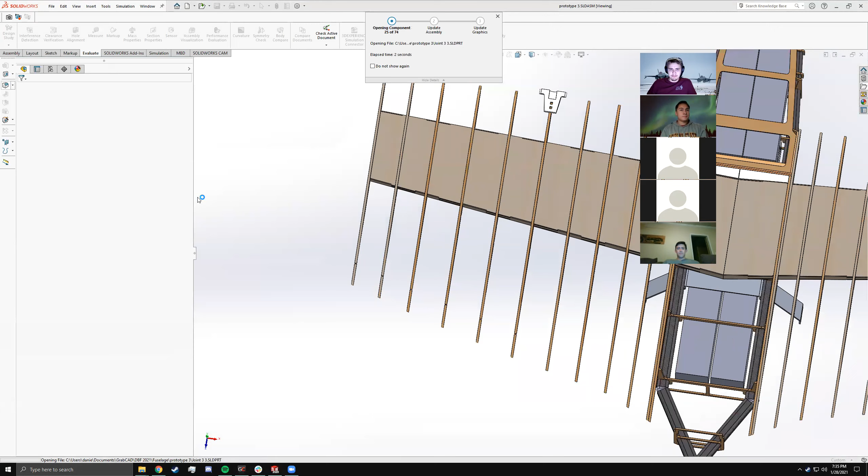Without further ado, let us open up the CAD and show off what some people have been doing. So here is our work so far. We have the aircraft mostly feature complete.

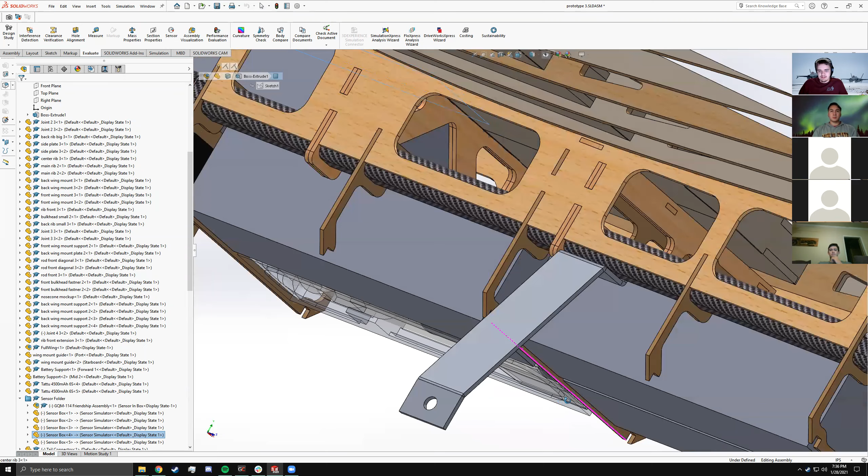There's still some things that need to be done, like actually placing servos inside the CAD model and getting the front landing gear in, and placing in supports for these payload boxes in order to prevent them from shifting around during flight. We also need to design some sort of floor and access mechanism to get these sensors or payloads in and out of the fuselage for mission 2, the payload delivery mission.

There's also a configuration manager, which I've spent a lot of time on and had to redo multiple times. Now there are the various different payloads, or the configurations, for mission 2 — for example, if we were to only fly with 4 payloads in mission 2, or 6 payloads in mission 2, and of course mission 3, the flight with a single payload.

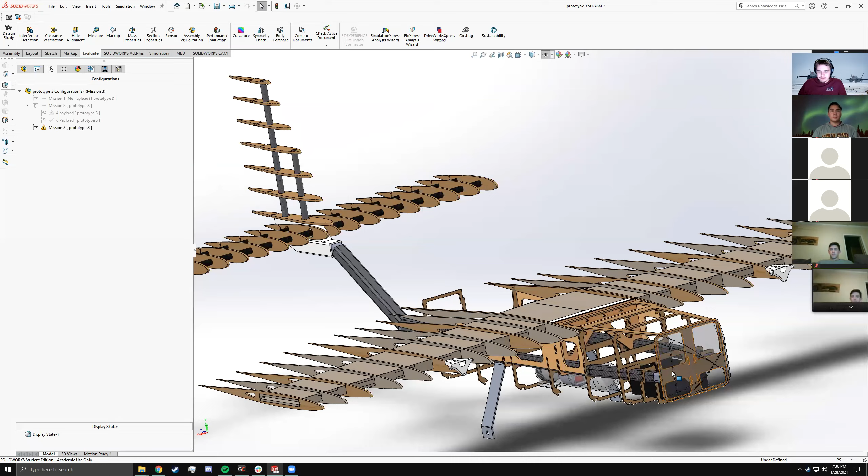We do need to make some minor adjustments to this configuration in particular, in that there should be a recess in this bulkhead right here in order to support our sensor design, or our sensor inside the fuselage while it is strung up, basically.

We also need to include the retraction mechanism that's still in here, but other than that, there's a lot of good work in here that I am very proud to see a lot of our members contributing to.

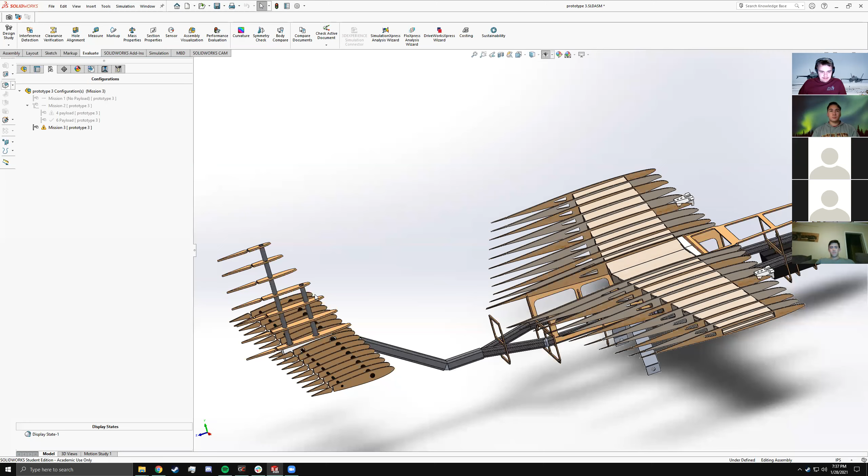Like Zach, who was working with Kevin to design our empennage for the aircraft, which you guys have done a really good job on. And Pranjul, who's working on the fillet that basically connects the aft end of the bulkhead to the keel in an aerodynamic manner. So good work, guys, on that — give yourselves a pat on the back.

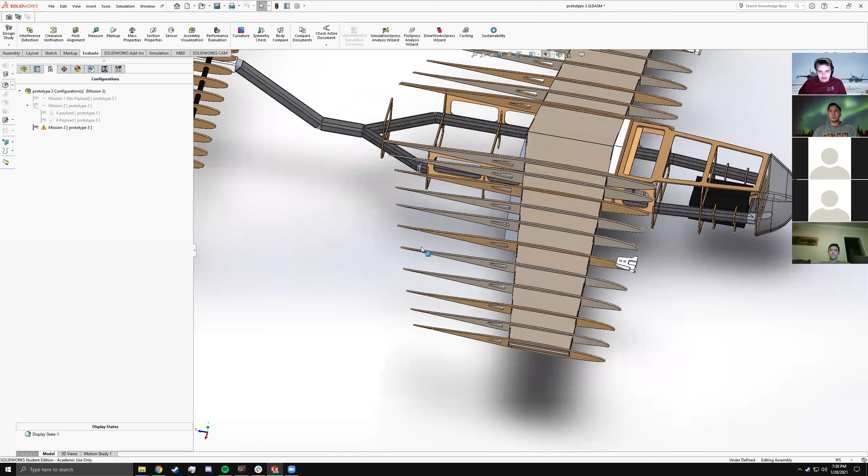But yeah, what we were just discussing about earlier in the conversation is that there are a couple things that we need to update on the wing of the aircraft.

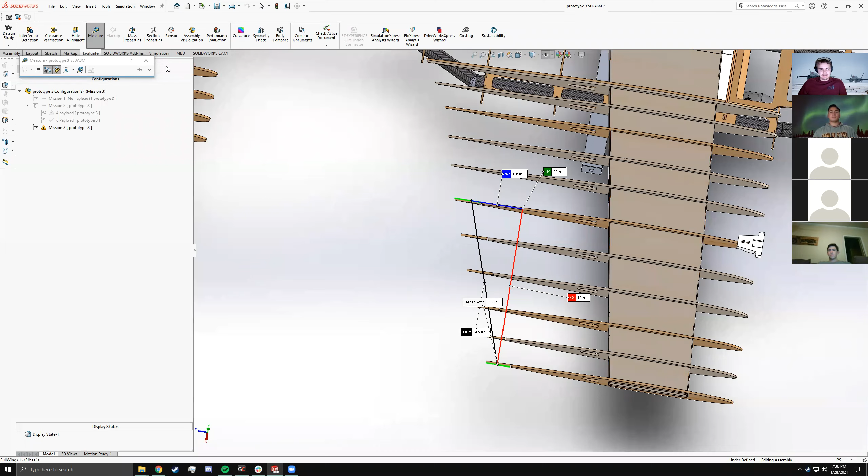Currently we have the ailerons sized at 14 by 2 inches, and I don't know how long to the center rib... I think it's 14 inches by 2, so 28 inches on each side. We need to basically shorten the rib and/or shorten the ailerons and make them wider in order to keep the same area, but also significantly ease our actual manufacturing, because little tiny bits of plywood are liable to snap and break and not do anyone any good as ailerons.

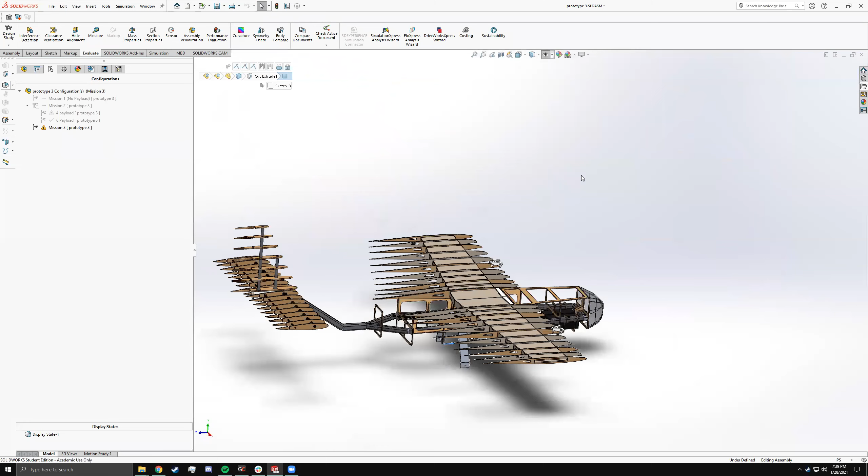Well, some planes might be able to fly without ailerons. This one might be a bit difficult. Ask Evan, how easy would you think this plane would be to fly without ailerons? Me? Yeah, probably... without ailerons, you cut out there. I don't think you'd be able to fly it without ailerons.

So we'll make those a little—finalize the shape of that in the near future.

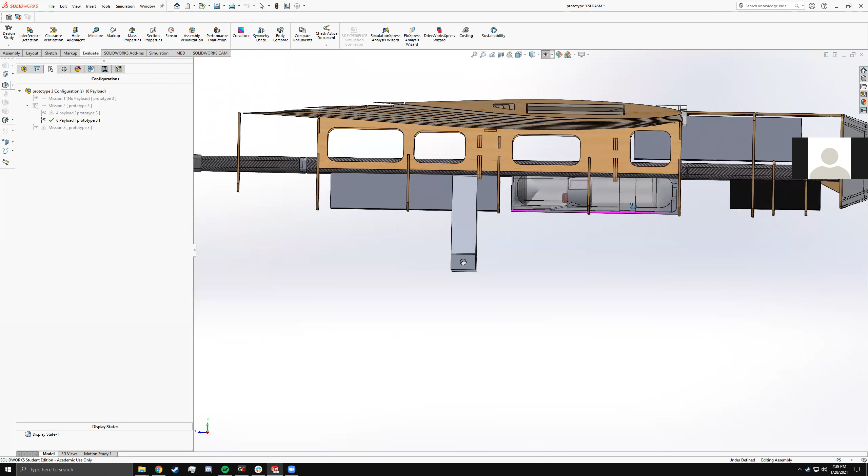Another thing we were discussing is that with the Mission 6 payload configuration, which will be about 20 pounds of aircraft all up, we'll need to have our landing gear maybe forward of this bulkhead. That has to do with the rotation angle on takeoff.

What is the command to rotate the camera in SolidWorks? Like, I know I can do this, but I want to rotate around the x-axis. I believe hold Alt and something. No.

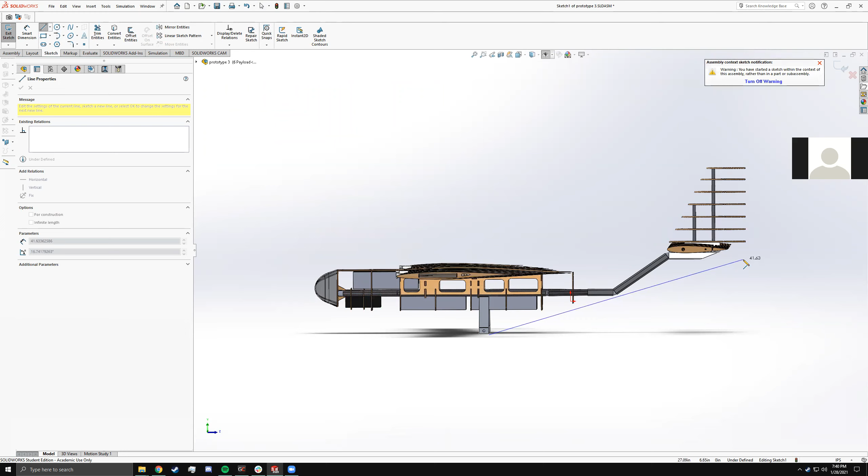All right, whatever. So basically, if you can imagine on this, there is an angle that exists here on takeoff that is dependent on the landing gear's location and the location of this kink in the tail. So if we move the landing gear up to say here, that angle is now shorter, and that's less rotation than we can get on takeoff.

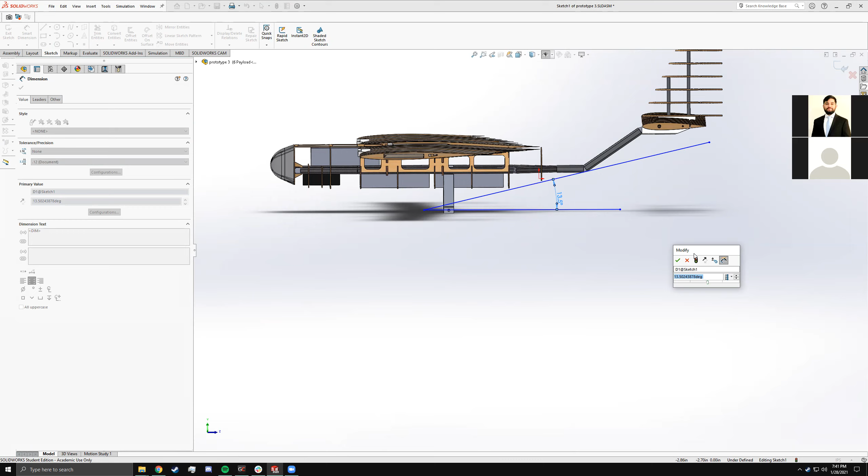So that's something I need to go ahead and figure out, because currently that's 13 degrees angle of attack on takeoff, which is probably enough. The plane will probably stall out much sooner than it gets 13 degrees AOA. But yeah, that's just something we need to take into account when designing this aircraft.

Would adding a sweep to the wing help for the rotation that you were talking about?

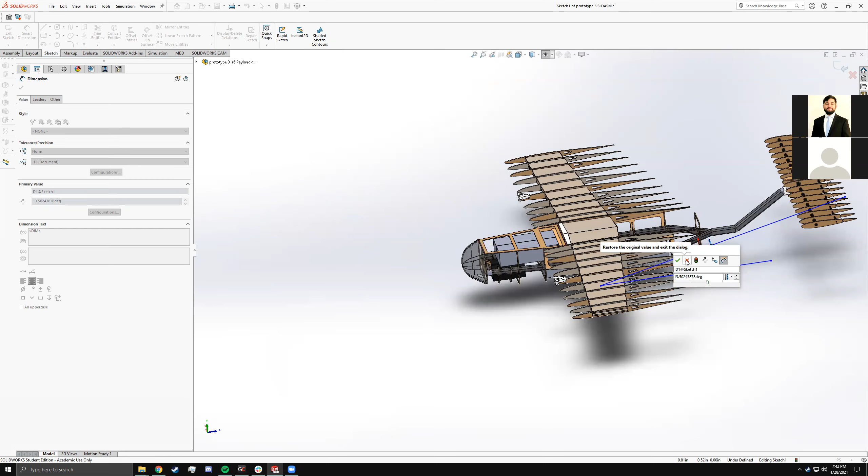No, no. Adding sweep to the wing would move our center of pressure generated by the main wing structure farther aft, which would actually make it a lot harder to rotate the aircraft on takeoff, because the center of gravity would be farther away from the center of pressure. That's the opposite of what we want. Stability is one of the most important things when designing an aircraft, but if the aircraft is too stable, then you can't get the nose up on takeoff, which is something we want to avoid.

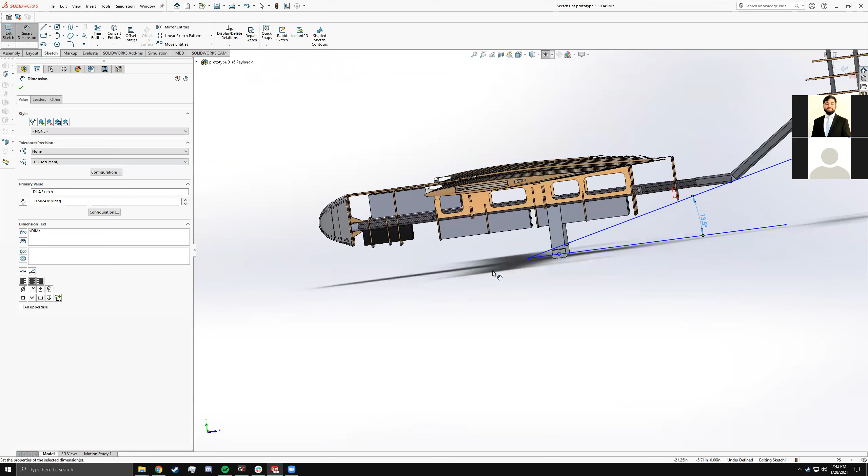We'd like the aircraft to be as close to balanced with some stability as possible. Less 747, more, I don't know, C-130.

So, where exactly, or what's the difference between the center of pressure and center of gravity in this aircraft right now? How far are they? Kevin, you want to cover that?

Figuring... Oh, can you hear me or no? Yeah, we can hear you. Okay.

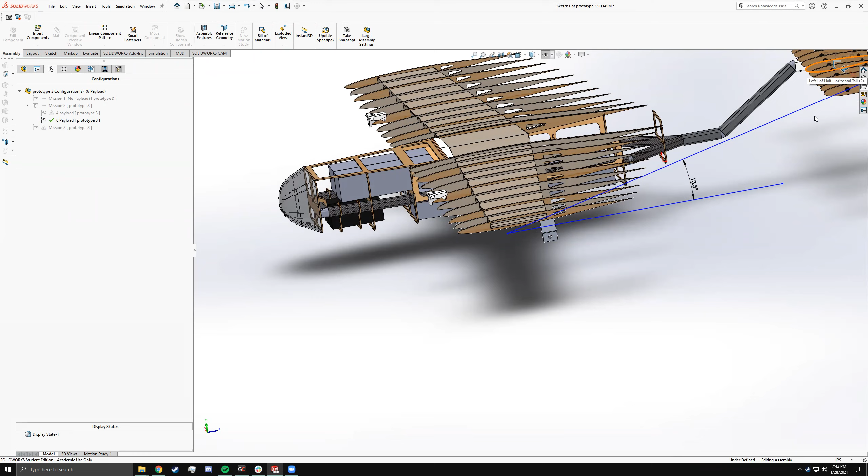So it's going to really depend on what mission we're flying and how we configure the plane, which is something we still need to figure out once we get all our weights and everything double checked. So for mission one, when we only have one sensor, that's going to put basically all our CG wherever we want it to be pretty easily. But for the second mission, when we're going to carry all these payloads, it's going to depend on if we can 3D print them and put a lot of mass in certain places. That's one thing we're trying to figure out if we can do in our manufacturing.

Right, okay, thank you, Kevin.

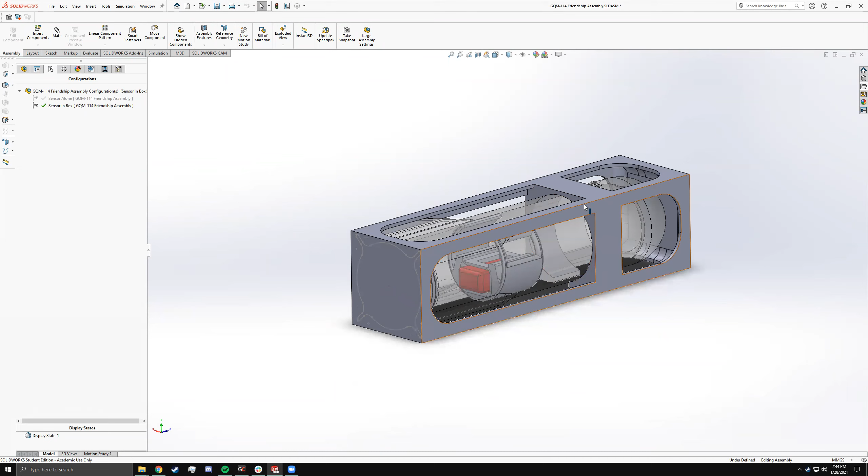I'm working on that right now. I have been hard at work 3D printing our actual sensors. Let me just get that in the tree. I want to open the subassembly. So this is the sensor payload that I have, I designed the aero shell, and then Natish, who is not here right now, designed the actual electronics of the sensor.

I just change this to the actual exterior. So this is the CAD model that I've been working on. If I just open this part directly, and then here is the actual sensor as built. Let me just turn off my virtual background so it doesn't get cut out.

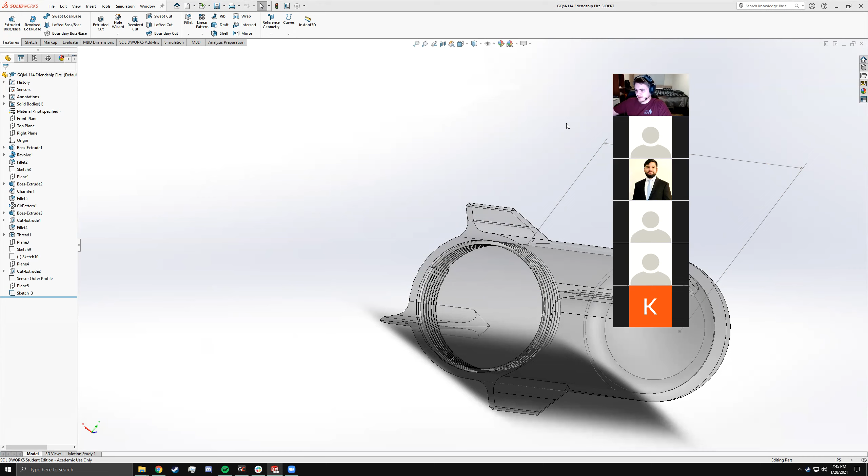So here is the sensor as 3D printed. It has threads inbuilt and aeroshell basically, but it might be heavier than expected. So I need to get a scale to actually weigh it and figure out how heavy it actually is so we can then adjust how heavy everything else needs to be.

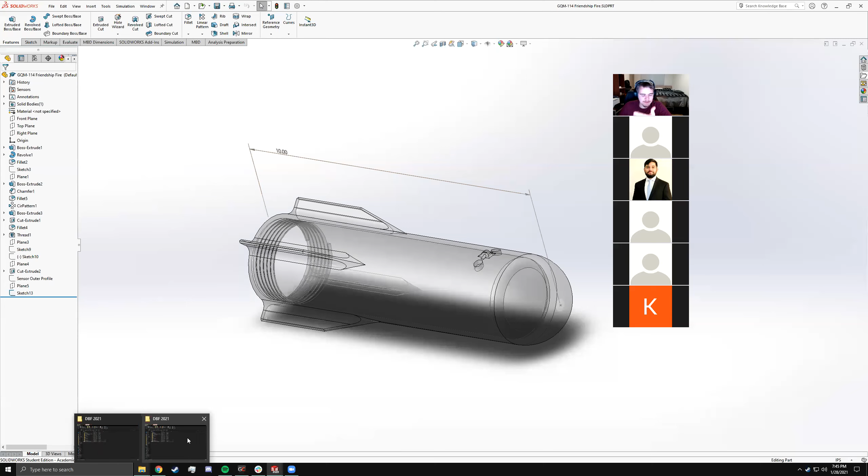There was a weight estimation in the SolidWorks, when I actually printed it out, of about 600 grams or so. Dang, so this might be actually kind of heavy, and I might need to print this again, but with some different settings to hopefully add lightness.

There's a lot of things you can do when actually printing this versus how it's designed, to adjust how heavy it ends up being. So I'll play around with that.

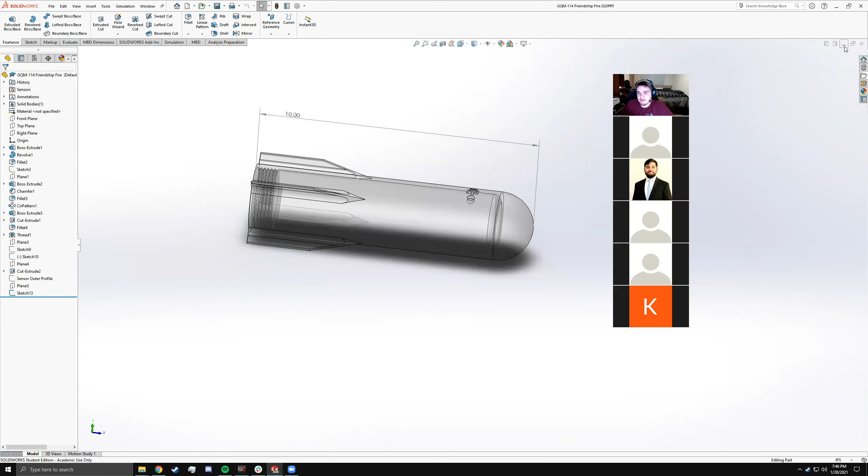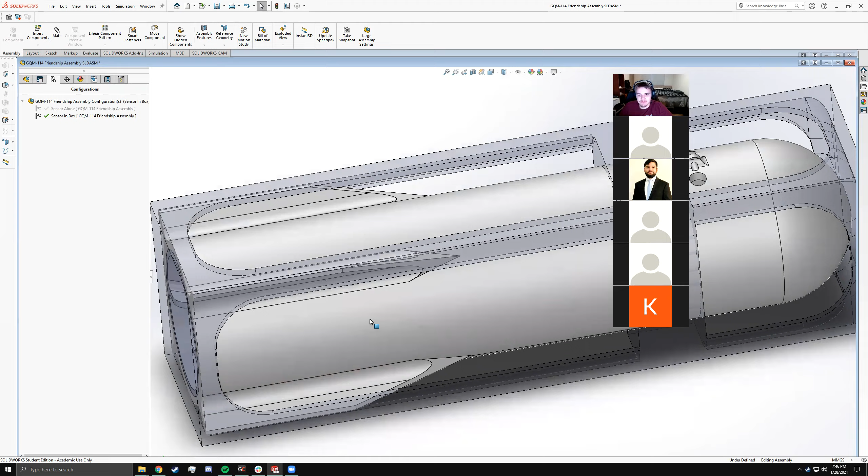I had a question in the chat earlier about how long this took to print. This took 17 hours basically of my printer running in the background. I'm running the printer right now to make the other components of this subassembly, such as this back insert here, which acts to create drag on the aft end of the sensor. We want the center of pressure to be as far back as possible to make this thing as draggy as possible.

Did you make sure the threading tolerance isn't too tight? We'll find out. Luckily, this base insert is a lot quicker to print, only about 3 hours, so I can print another one with slightly different sizing and threads to try and get one that fits, versus this one that takes a long time. In fact, we might even try to test fly this this weekend, if possible.

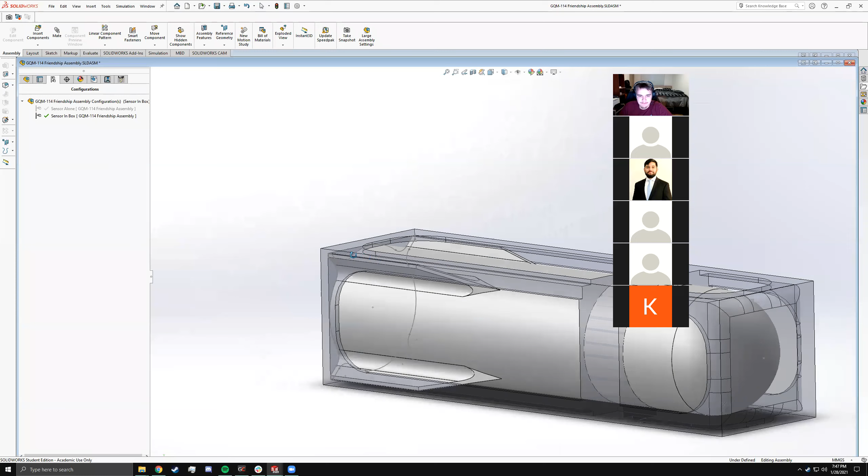Yeah, we need to bring the plane. Oh yeah, Evan has it, right? Yeah, and we can basically tow this underneath last year's aircraft and determine how stable it is, basically, without any mass in it. So that'll be something we'll figure out tomorrow in the leadership meeting. We'll let you guys know when and where we're gonna be if we do plan on test flying this weekend.

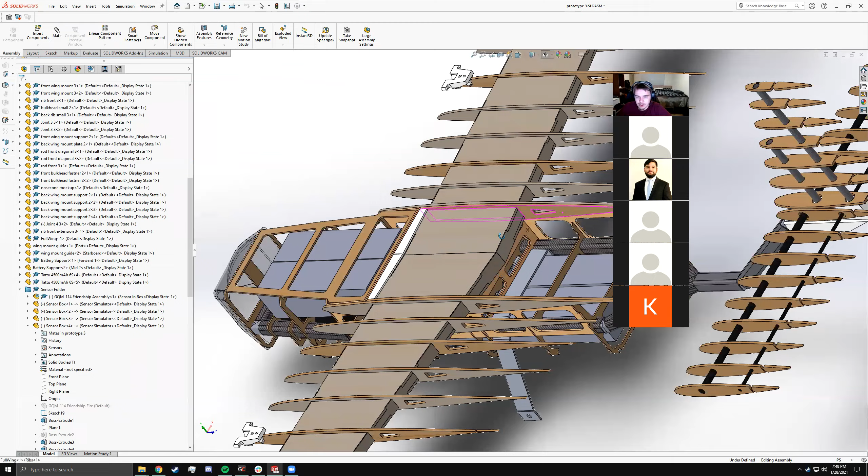So going back to the main CAD model, landing gear placement needs to be finalized. We also need to design and implement into the model how the aft end of the torque box will be held on to the aircraft, basically.

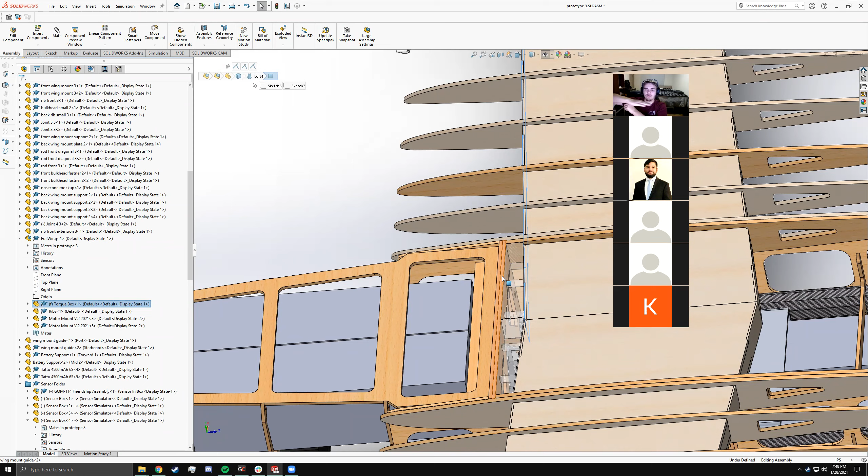The current plan is, if I just change the transparency of these guys, there are channels here that connect to this front bulkhead that then go into the torque box, and there will be dowels that connect the two to prevent the wing from twisting off the fuselage. But we still need something to prevent this back end from sliding backwards or lifting off too much and snapping this whole bulkhead, because both of those would not be good.

The wing is probably the one part of this aircraft that needs to be staying on all the time. We can lose bits and pieces here and there, and it wouldn't be pretty, but if we lose the wing, all hope is lost.

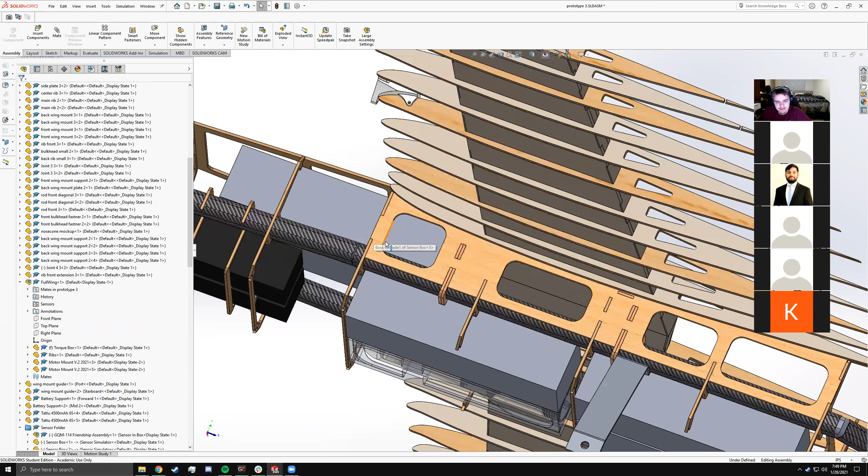There's some really good design elements in here that I'd like to highlight, which Ivan helped put together. There's this side plate that forms the main part of the fuselage. What's really cool about this side plate is that it also acts as a locating feature for all of these bulkheads that go throughout the body of the aircraft.

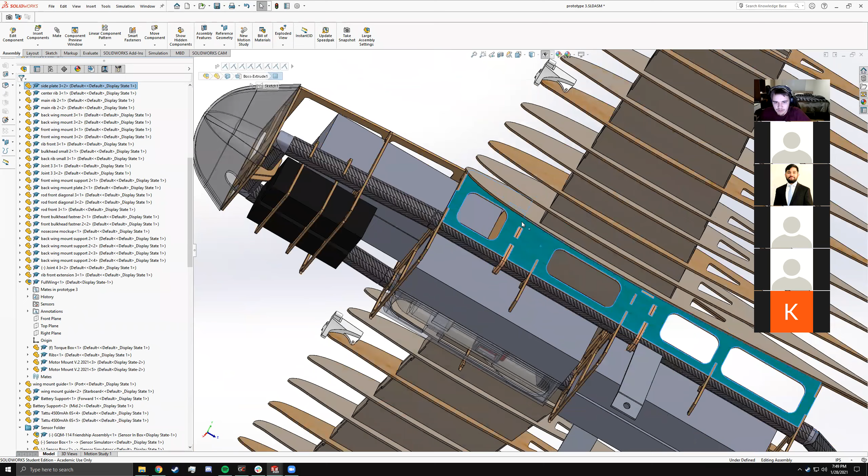Unlike a lot of competitions, we actually have to end up building this thing—still working on that. By having this side plate referenced to these bulkheads, the side plate acts to locate the bulkheads onto this bar. So by simply putting this piece together, snapping the bulkheads with the side plate, everything is already pre-located, and we don't really have to guess where things need to be.

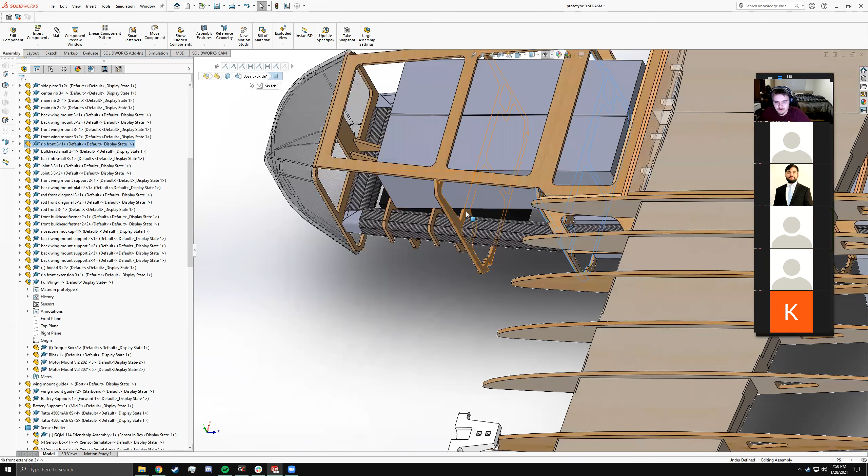You can't always get away from that. For example, this piece, we're gonna have to carefully measure the distance between these two before we glue on the bulkhead to the keel piece right here, and same deal with these pieces which hold in the battery.

But as much as we can get away with it, I'd like pieces to have some locating feature on them. And as part of that...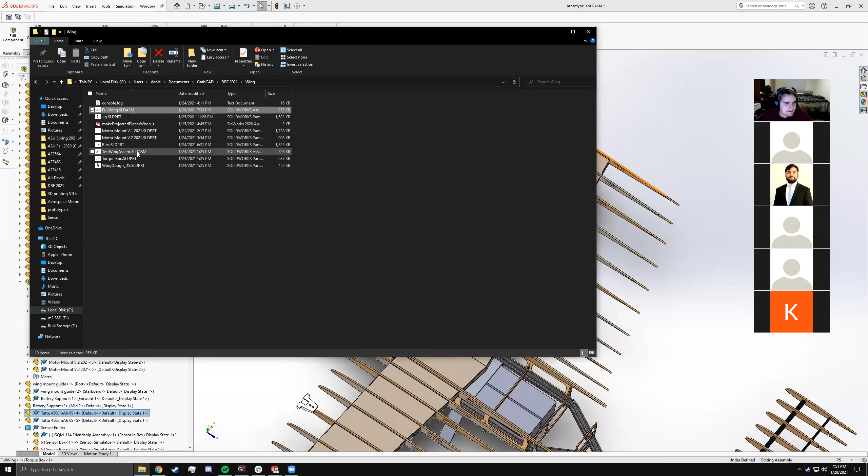Jack here went ahead—where did you put the jig for the sensor retrieval? Jig? Okay, yeah, then that is going to be under the wing. Gotcha, the jig is right underneath the full wing. Okay, do you have the assembly with the wing in it? Yeah, you do. That's just the mock wing, though.

So this is an example of making manufacturing tooling that we can actually use to build the aircraft. This piece, the torque box, is made of a couple pieces of balsa wood glued together. But then we have to align ribs onto the torque box to actually make the wing, and the placement of these ribs is fairly important.

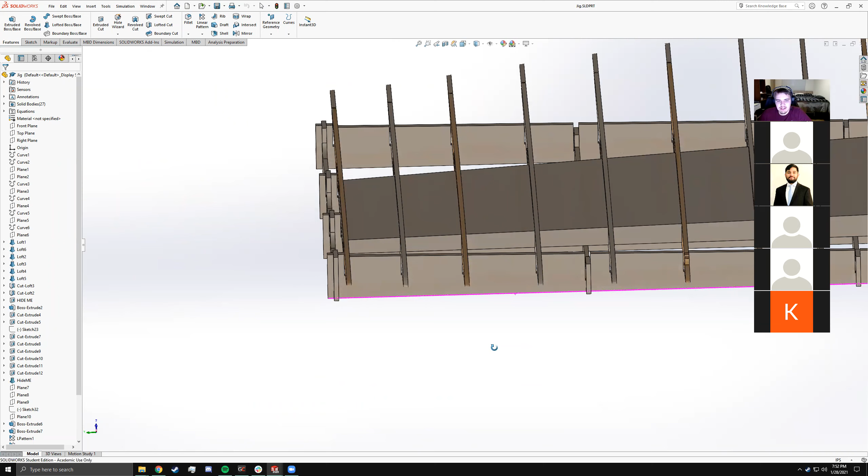We want them to be as vertical as possible, aligned with the torque box, as well as properly spaced, because if they're too close together, we end up losing some of the strength of the wing. It also makes things harder, especially if a rib is misplaced, since that's where the motor actually attaches to the wing. If the motors are asymmetrical, that causes problems for our test pilot, Evan, so we want them precisely aligned. Having a piece like this that we can laser cut to the machine's precision, instead of using the old Mark I eyeball to guess placement, helps a lot.

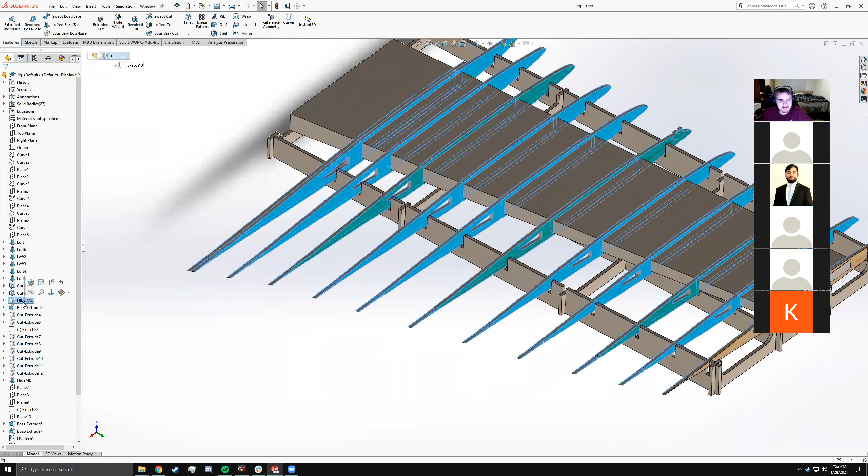That looks really good. There's two things called 'hide me' - if you hide them, it just shows the jig, not the wing.

This will be something we can laser cut out of wood, which will make building the wing a lot easier. In the actual aerospace industry, building it is probably 60 to 70% of the battle versus designing it, so it's good to have that design sense in our actual CAD model.

All right, so does anyone have any questions?

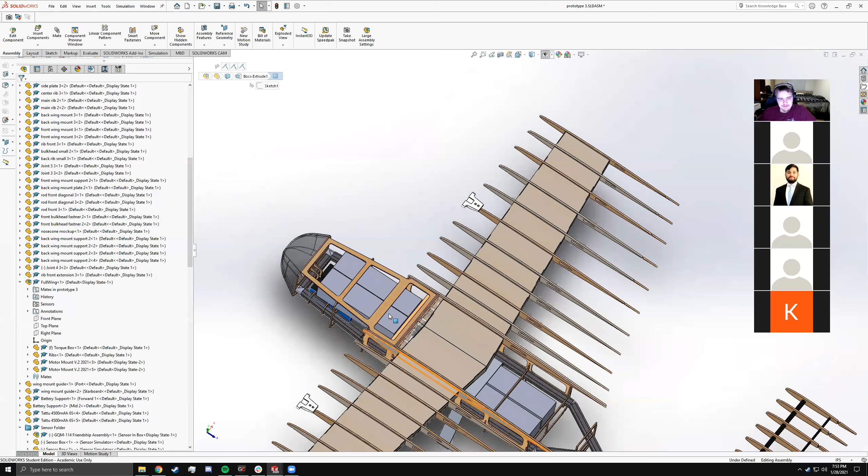If you want to try to put in the sensor retrieval mechanism, I haven't changed it very much, but you can import it in.

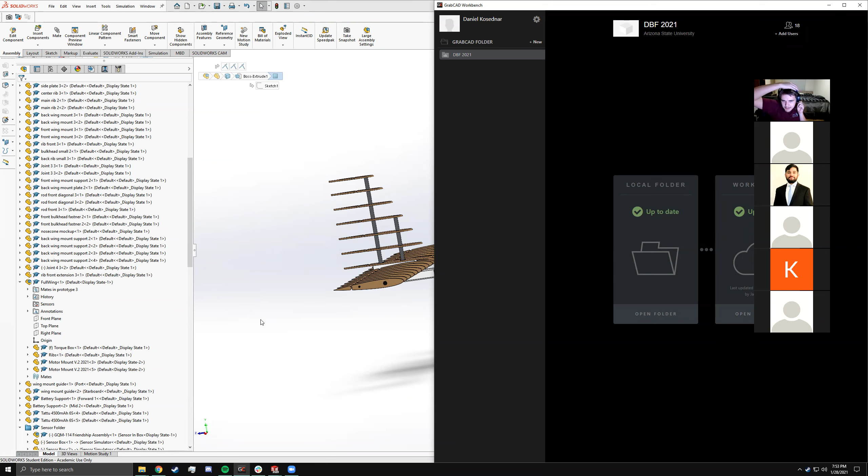All right, where is this supposed to fit? I should probably make it mission 3. It's pretty much right next to the batteries, in between them and the one sensor.

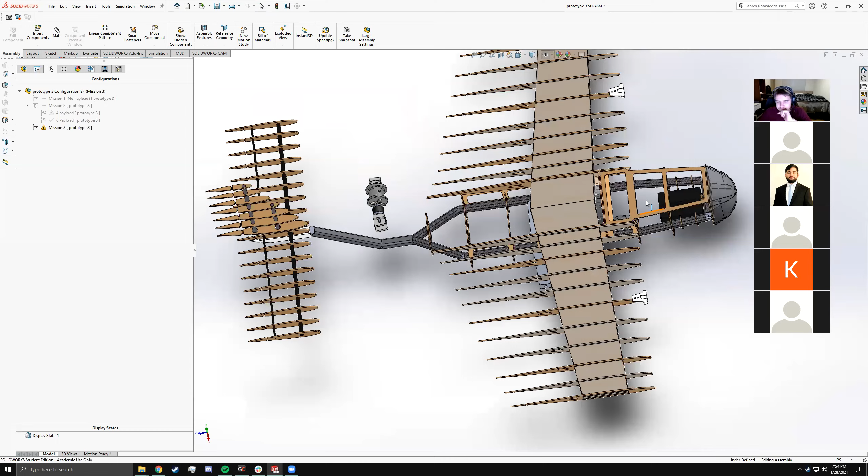I have a message in the chat. Can someone read that to me?

I am a freshman, I don't really understand anything, but I find this stuff so interesting. Hope to learn a lot from you guys. Sure will, yeah you will. I was once a plucky freshman who didn't know Jack. I didn't know Jack as a freshman, but now I know Jack. Your puns are great. In fact, now you know multiple Jacks. Yep, now I know multiple Jacks.

All right. How do I push this forward?

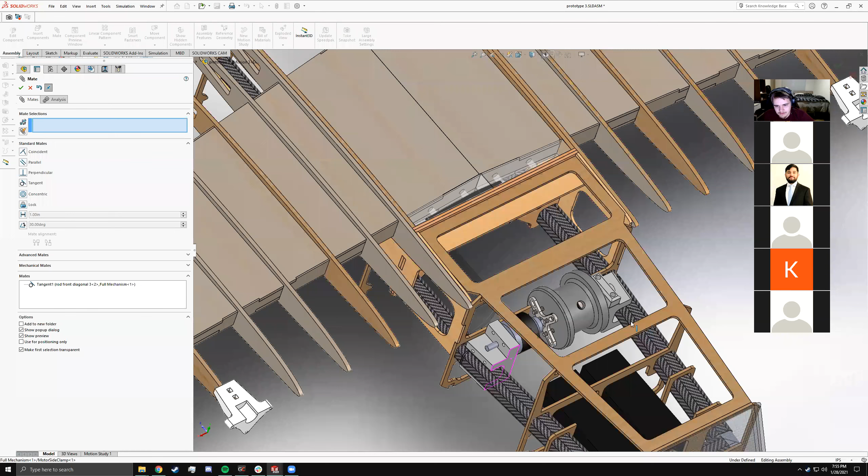It's also never too late to get involved, because there's still lots of CAD stuff that needs to get done on this. If you want to learn, just let any of us know, and we can help you out, and you can help design parts of it.

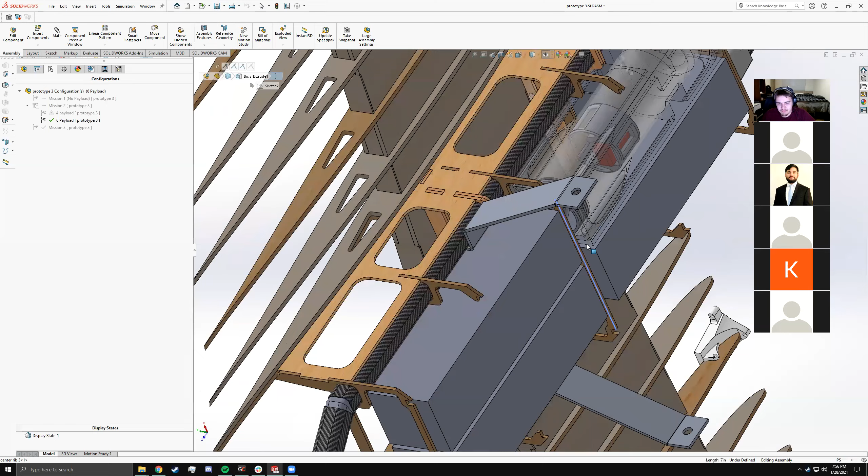Like I said earlier, we had a new member help build this empennage assembly to get that all set up. But we still need pieces designed here to hold the payloads in position inside the fuselage. Probably a floor plate, a removable floor plate installed here for the ground mission to actually load the sensors into the fuselage. That also needs to prevent the payloads from falling out in flight, because that would not look very good if our payloads fell out of the airplane.

Can you show me exactly where the bomb bay door is going? Yeah, is it just the...

Daniela, have you figured out the integration yet of that? Is she not here? She was here earlier.

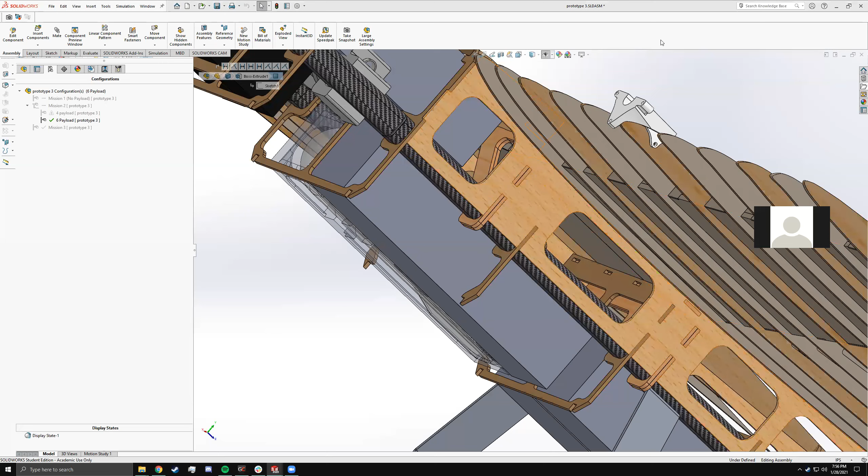Is it just between the first bulkhead and the second one? Yeah, it's between these two bulkheads. There's going to be some servos down here that actuate the doors.

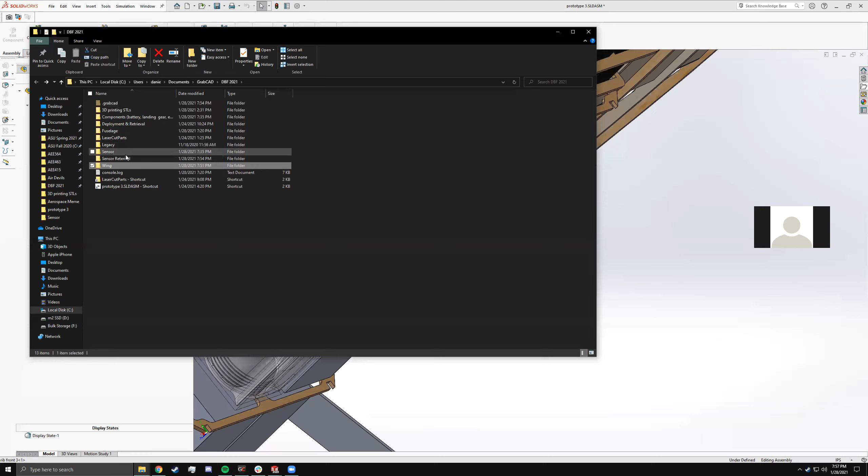I'll have to make sure I don't put my sensor mechanism in a way that will block that. It'll look something like this, basically, with servos back here, so the doors open up. Most of the intruding parts are in here, but we might have to, considering how tight the fit is...

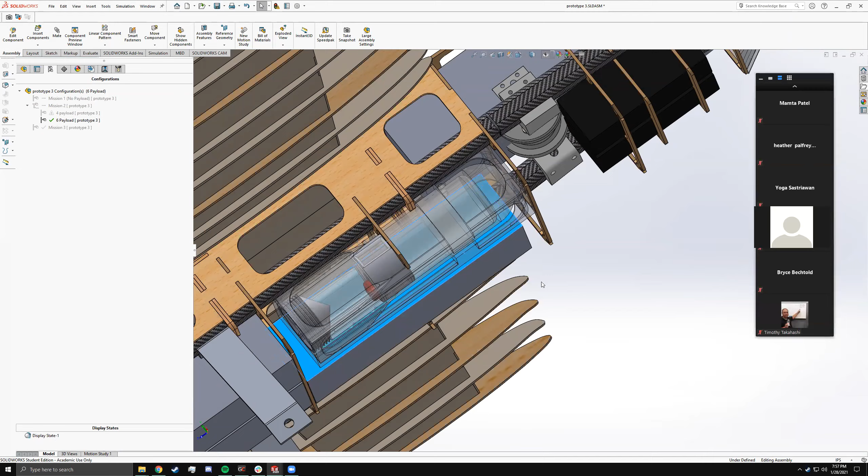No, don't do that yet. Okay, we still have some room that I can move these payloads back farther, and basically we'll have room for those servo arms to fit in front of the payloads inside this bomb bay area. But that will be an integration fun time.

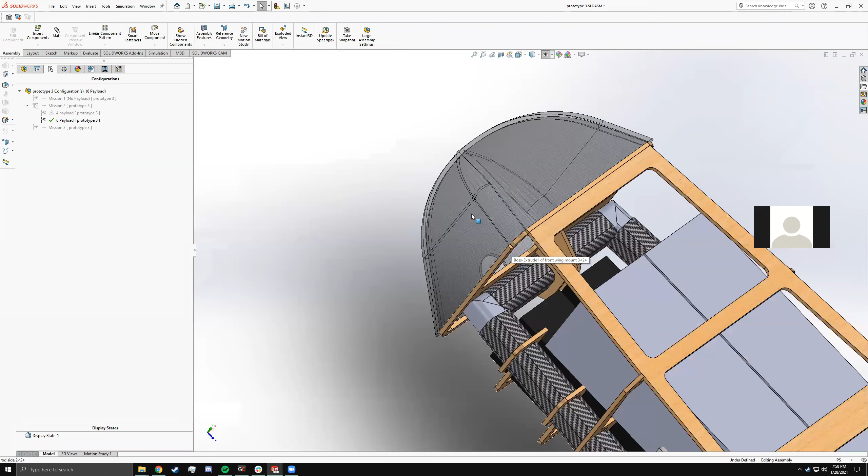SolidWorks is thankfully pretty easy to learn. I learned it mostly through the club, not through the CAD class. And thankfully, it's a lot easier to learn than CATIA, which is a whole other ball game right there.

Overall, this is looking really good so far. We just need to get the last features in, and as long as the payloads fit inside the plane, that's the main thing I've been worried about this past week. So it's looking pretty good, but you just have to watch the space in here to actually fit the moving bits.

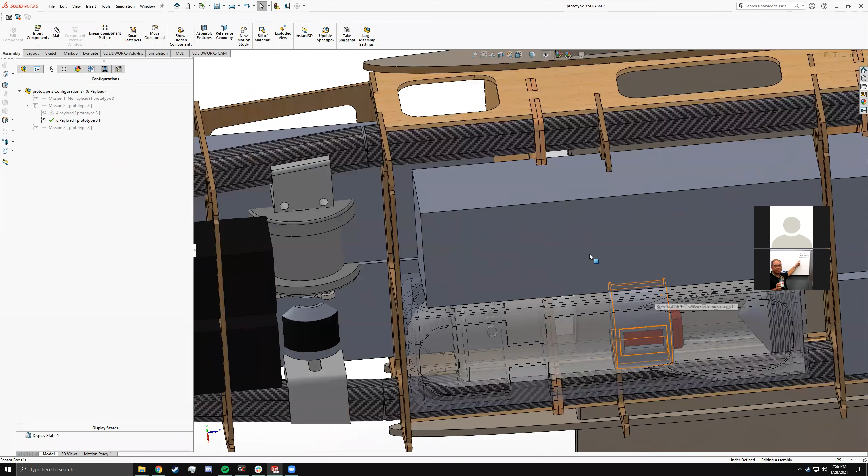Hey Daniel, it's Tim here. Hey Tim, the advisor. Okay, I like the way the loft came together. The only thing is, do you have any more confidence at this point that we are good to go with center of gravity? And if not, what's the fallback position if we got to stretch the nose and move the batteries further forward?

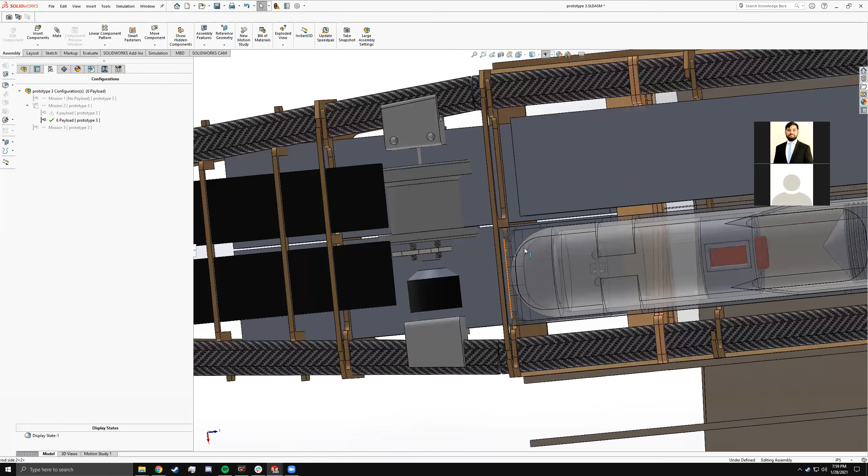So each of these boxes is about a pound. And because the payloads, the sensors just need to be the same outer dimensions and the same mass as the sensor inside the box, we can weight the front of the box versus the back. Therefore we have a lot of freedom to say, for example, our center of gravity is too far forward. We can flip these payloads upside down, just flip them around, and now we have more mass aft, and vice versa.

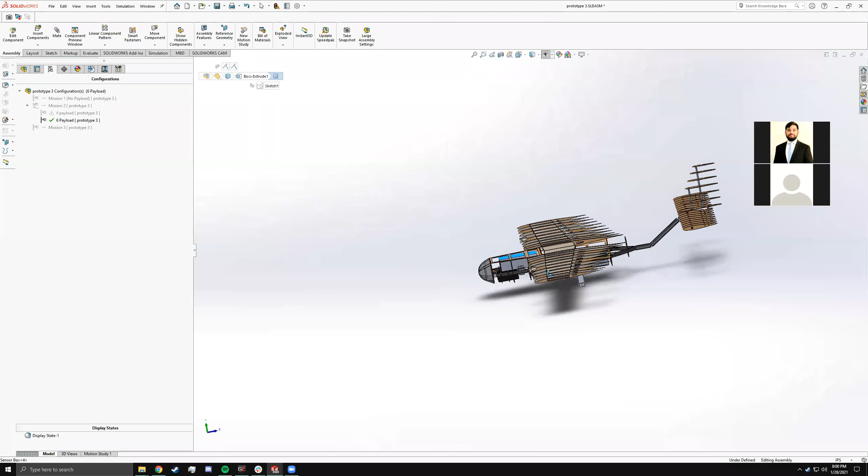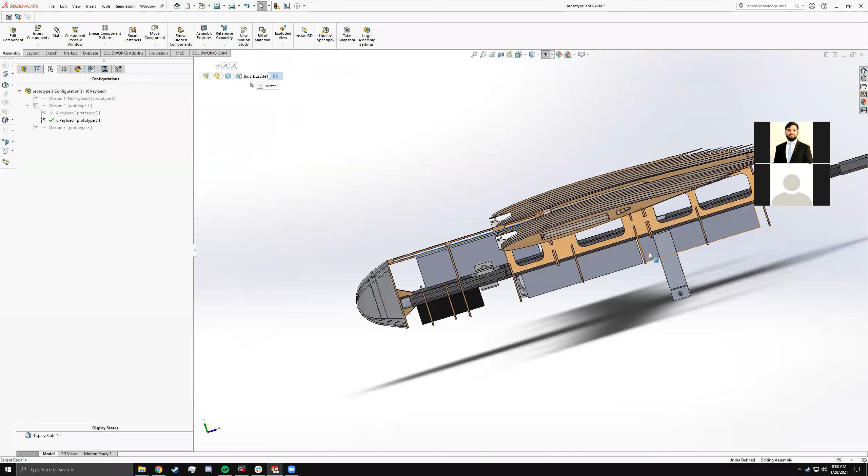So as long as one side is weighted versus the other, it should make things easy to balance out. And we already have a pretty hefty amount of nose on the aircraft, especially if we leave this back section hollow. We could fit 8 payloads in this aircraft, but with 6 front heavy like this, we should be fairly good to cancel out the mass of these two affecting the rear, or to counteract that.

Daniela, how's your progress on getting the bomb bay assembly into the actual CAD model? It's going good, I was working on that earlier. The only issue I have was from prototype 2 to prototype 3, I think the dimensions slightly changed, so I need to just readjust mine a little bit.

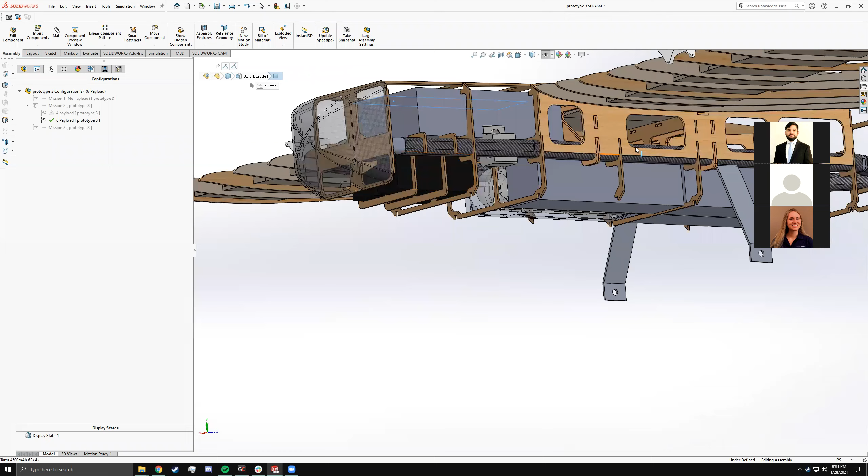I think I'm just going to throw on the door with the frame so I can have the hinges in an appropriate location. And then I might need a little more space for the servos to go in. Yeah, I was just talking about that. We can move these boxes about that far, and that gives you a little bit more space.

But moving other things around, like moving this bulkhead back, would be challenging, and moving this forward would also be challenging. So if you can try and make it fit all the way up there. Okay, I see, yeah, in this area.

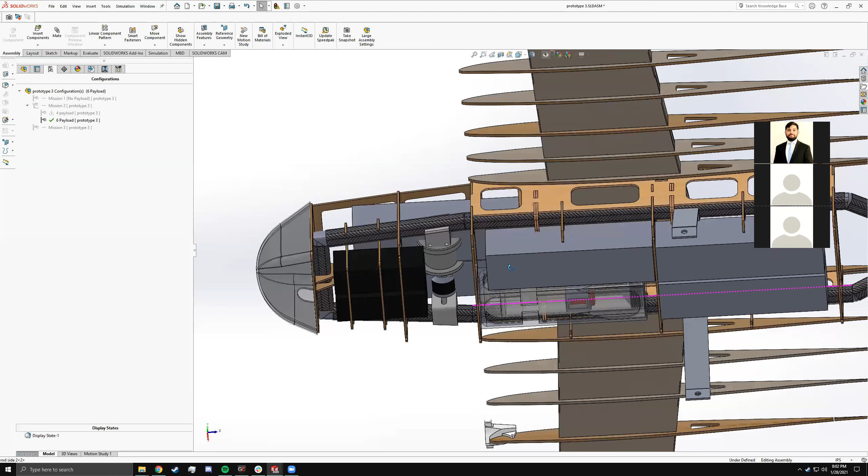I was looking at that rib right there, the main rib, I think. I was thinking of just filling that out and mounting the servos on top of that. But if you want me to push it farther back, I can. You mean this bulkhead? Yes. Just make it solid, like it's in your design. Yeah, just fill it out and then mount them on there.

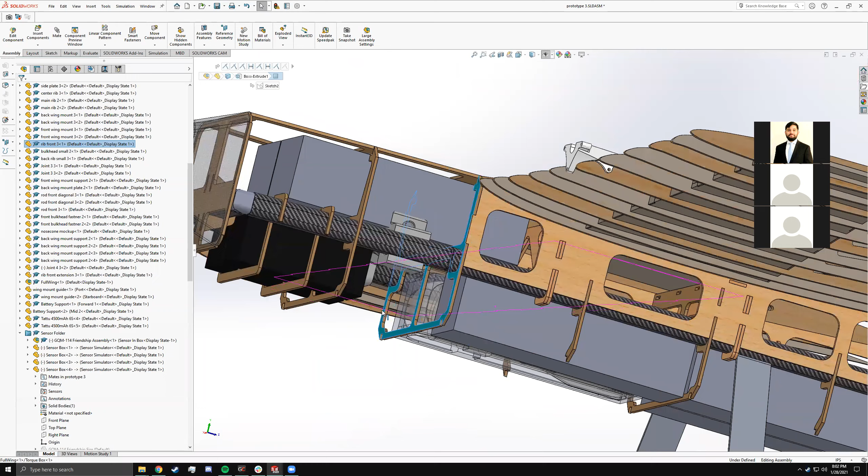All right, that all sounds good.

Jack, if we do end up putting this spinny thing back here for mission 2, we might run into issues. Do you rely on the exact geometry of this angle here to clamp in your mechanism, or do you think you can make it work so it clamps onto the inside keel bit here? So with the square idea versus an angled thing.

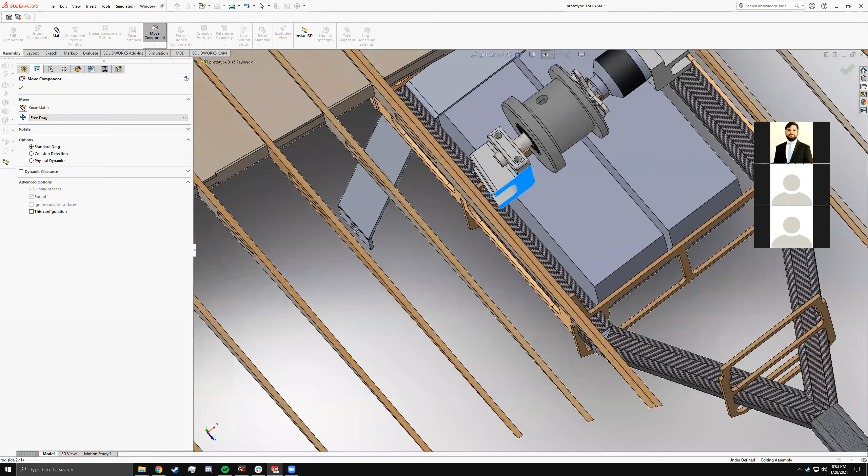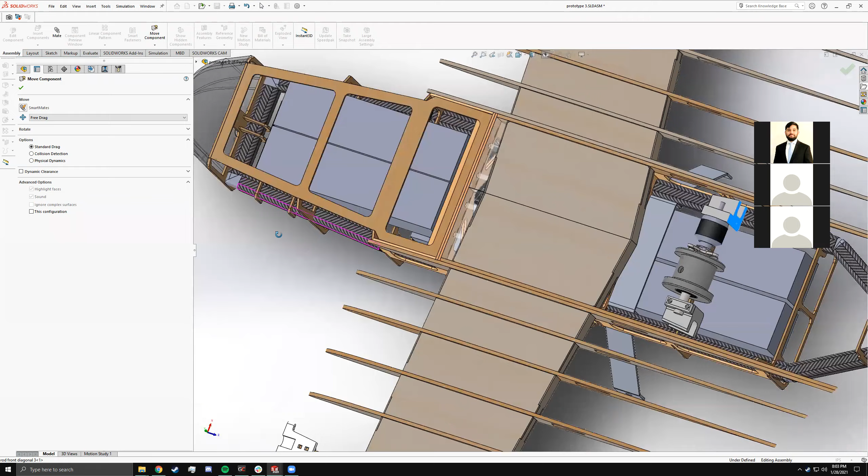The idea is, and I only have it on one side, that the wheel can be removed from the clamp mechanism, so the clamp can stay up front while the back just gets thrown back, like the barrel and the heavy motor. As far as the angle, that's actually really helpful, because any tolerance issues we have, we can just slide it forward, and that will tighten up the space between the motor end and the bearing end.

Okay. Hey, Daniel. Yeah.

You think we could make some of the 3D printed pieces to mount the wing in the front, in the back too, and then move the wing mounts further back? Move the wing mount further back? What do you mean?

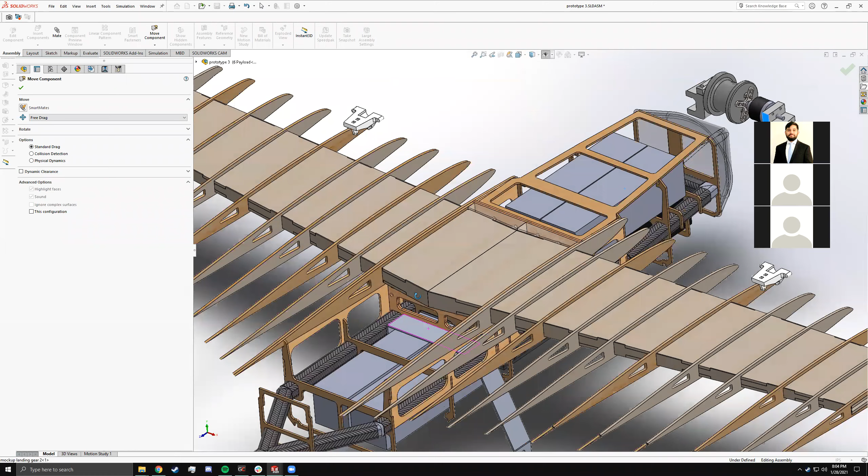So you see, I don't know who put those 3D printed pieces in the front of the wing mount. Yeah, that was Max. We could do that for the back too, and have like a bolt or something, the same sort of deal how we have pegs here, we have a bolt on this end.

Yeah, I mean, that could work. It's just that means we'd have to have some sort of access to this back end to screw and unscrew that bolt. Oh no, but it would be vertical. Oh, like a vertical, the same clamp thing, like how we have the...

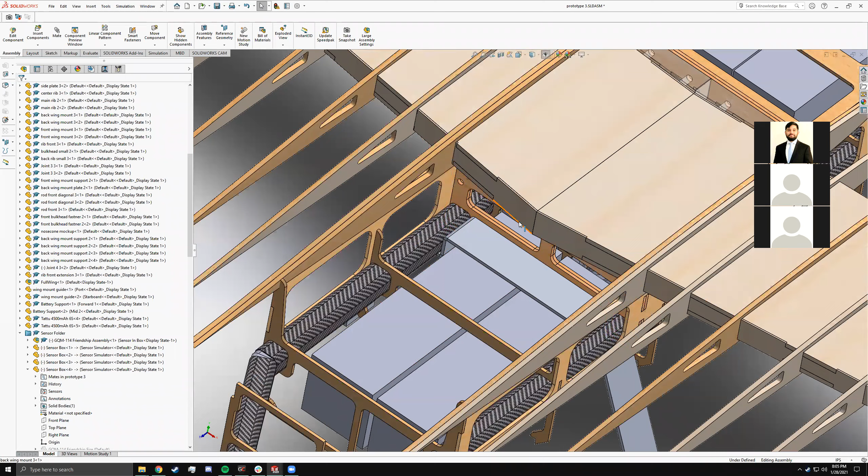Do I have it on this computer? No, I have it on my other computer. Like, how we have the clamp on the keel of last year's aircraft, instead have the clamp on this back end.

Yeah, 3D print an extender piece off the back like we have on the front, so it matches that angle. And then on that 3D printed part have two holes in it that the bolts could go through. Yeah, that'd work.

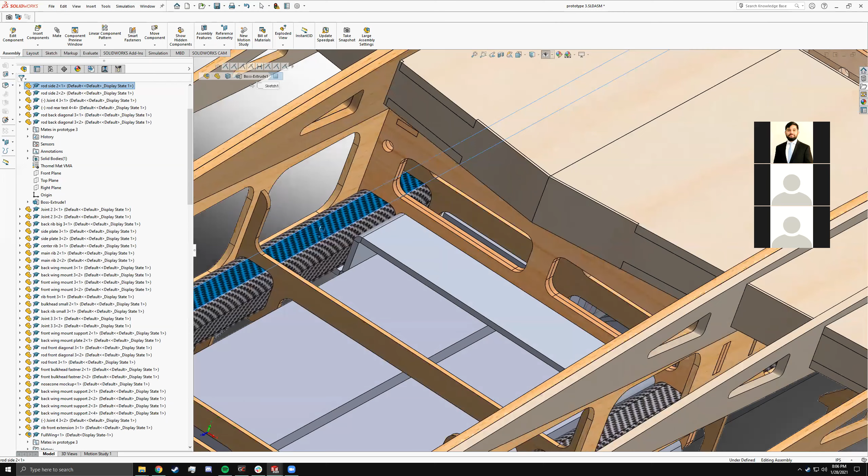We just have to make sure that 3D printed part is glued really well to the keel. Yeah, it'd have to be. That piece would have to attach, preferably mechanically, to the keel, because it'd be in tension and compression versus shear, mostly tension. So I don't want the plastic bit to peel vertically off of the keel.

So if we could make it fit into, like, maybe hook onto this bulkhead right here. Yeah. That would work.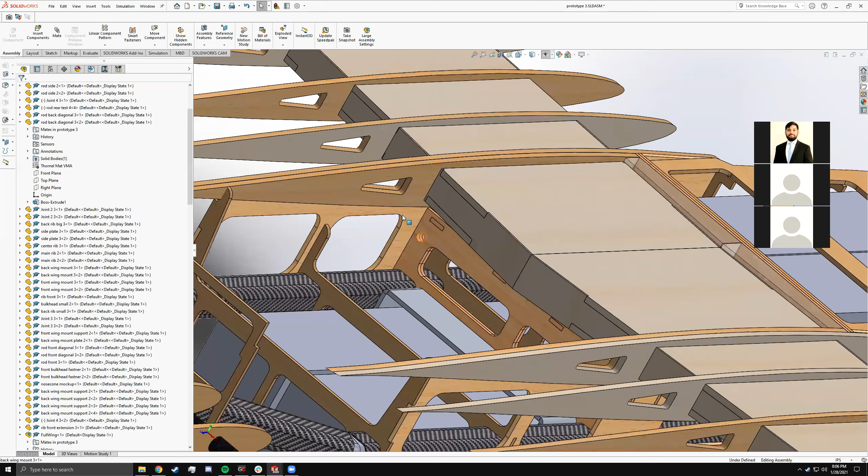So if anyone is interested in tackling that design challenge of fixing the wing back plate, basically fixing the wing on the back end to the fuselage, that is a CAD challenge in the making, as well as a mechanical design challenge, and a great example to talk about in interviews. I sure as hell talked about some of the stuff I designed in my interviews when I was talking to Lockheed and other companies. So great chance to get a story to tell.

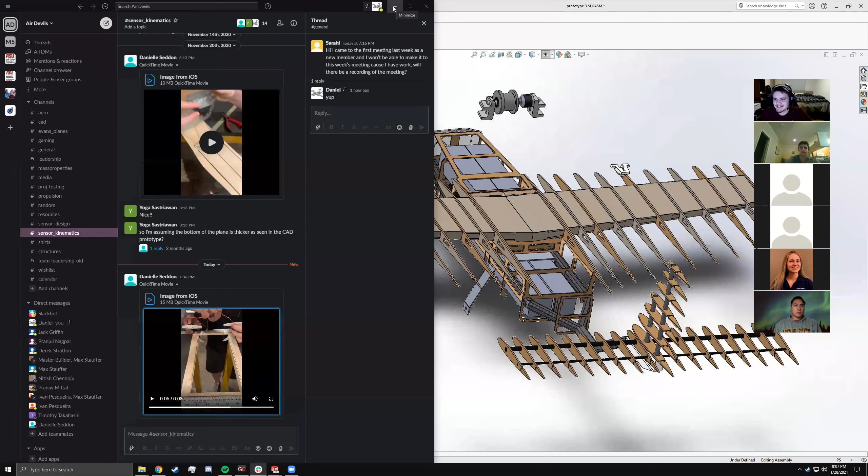Structures chat, yeah. Oh, here's the sensor payload right here. Oh, you guys were in the space when I was starting my meeting. Gotcha. Yeah, right, sorry. No worries.

All right, so that is everything I have planned to talk about for this meeting. Any questions, comments, and concerns?

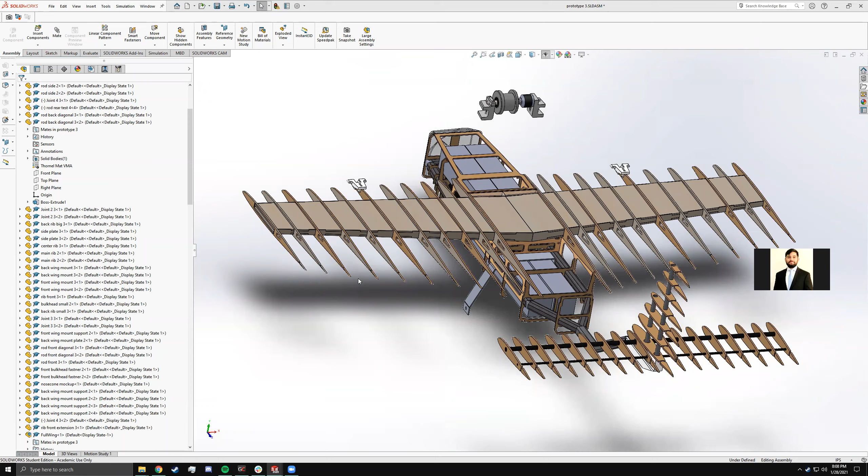Yeah, actually I have a couple questions. They're not mechanical questions, but I noticed you stated the missions — are those goals that you want to achieve with this built aircraft? And also, what exactly are payloads?

So, yeah, some of you might not be totally up to date on what our club is. We compete in the AIAA Design Build Fly competition, so we have a set of rules or challenges that we build our plane to. This is this year's rules — it's 20 pages of a bunch of nonsense for the most part.

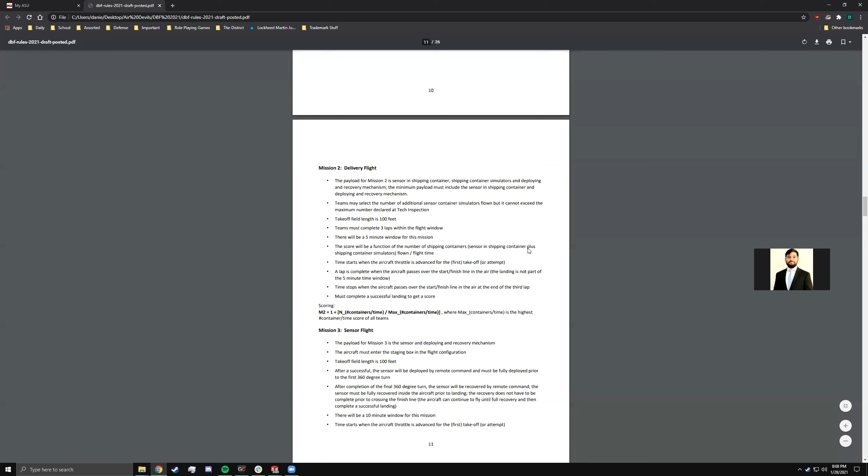But we have three missions that we have to complete in order to score — actually four missions, three flight missions and a ground mission. Two of those missions have performance metrics under which we are compared against the other teams. For mission 2, it's the delivery flight, where we have to carry a bunch of sensors in boxes. Is that the thing that you 3D printed? So, yeah.

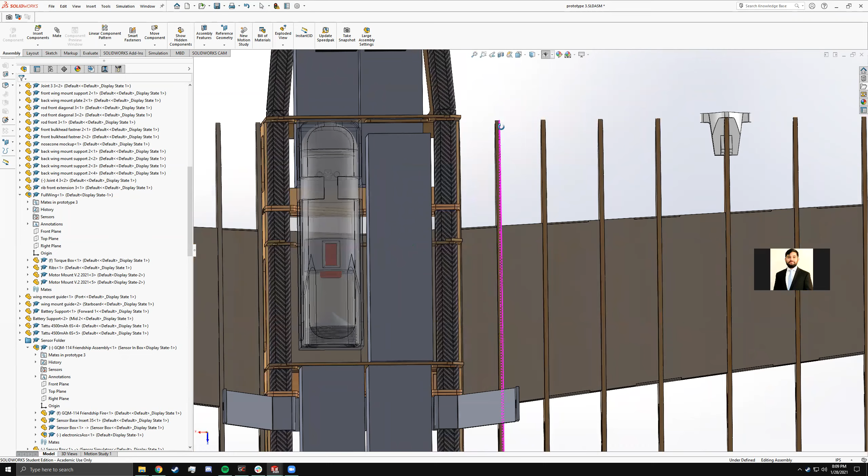So the sensor in the box is this guy right here, let me just adjust the transparency so it shows everything. Yeah, the sensor's in a box that has to be able to survive a drop from a certain distance. So that is in progress.

But awesome, then we have boxes that are just empty. They have the same weight, external dimensions, and mass as the sensor in the box, and it's to simulate carrying a bunch of sensors to a destination. So we have a bunch of those.

And then mission 3 is where we actually have the sensor. If you look at my camera right now, I'll go ahead and pin that. So we have the sensor dangling from the aircraft behind it, and then we have to retract it back in as well as deploy it.

So mission 2 is just carrying them around. Mission 3 is deploying this thing. So yeah, that's cool.

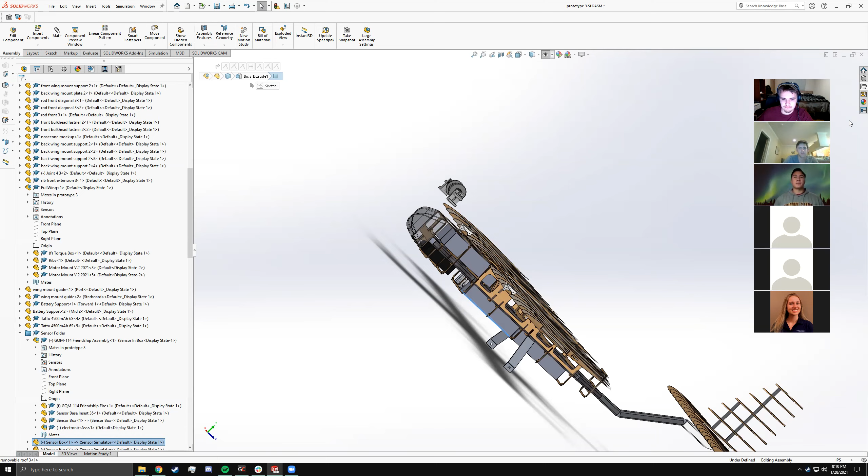How do you guys show proof of that? Do you guys record videos when you do it? We don't know yet.

We just got word last week or the week before that the competition in-person part is canceled, so it'll be virtual. We might have to submit a video of our plane. Otherwise, usually it's in person in either Tucson or Wichita, Kansas, and we'd compete against 50-odd other schools.

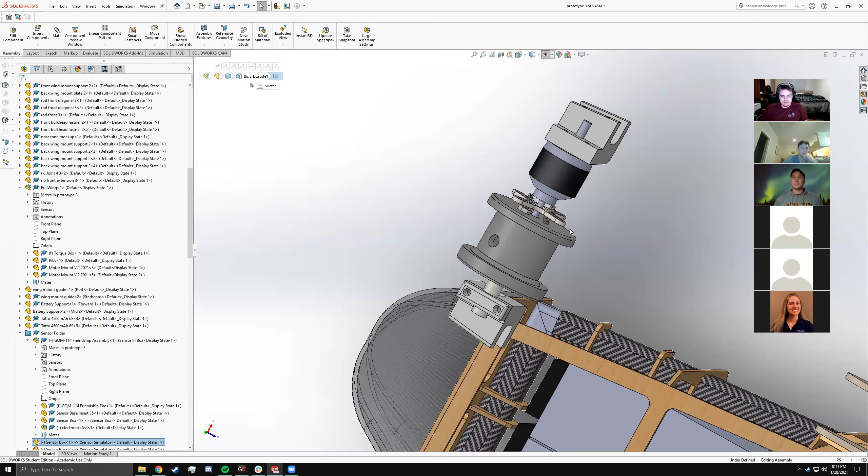Are we going to meet up once we actually get the aircraft built? Yeah, we're all going to have test flights. For the build, most of it is going to be virtual, as virtual as a build can be. The leadership team is going to meet up in person to actually build it, just for COVID concerns, since we can't really have a bunch of people working in close proximity.

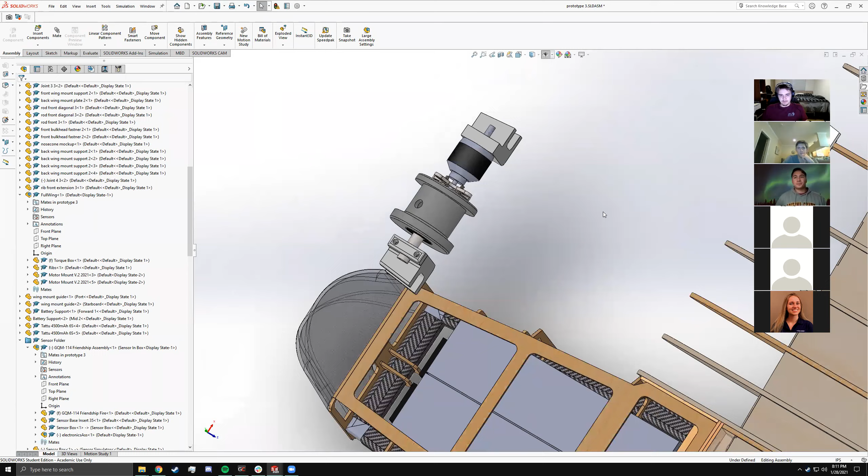Understandable. So we're going to have test flights, a chance to see your work in person, as we get closer to the competition.

The competition itself has a deadline of April 18th, I think, is the day. It's in here somewhere. But that weekend in April is when the competition is supposed to be, and that's when we're supposed to submit our videos.

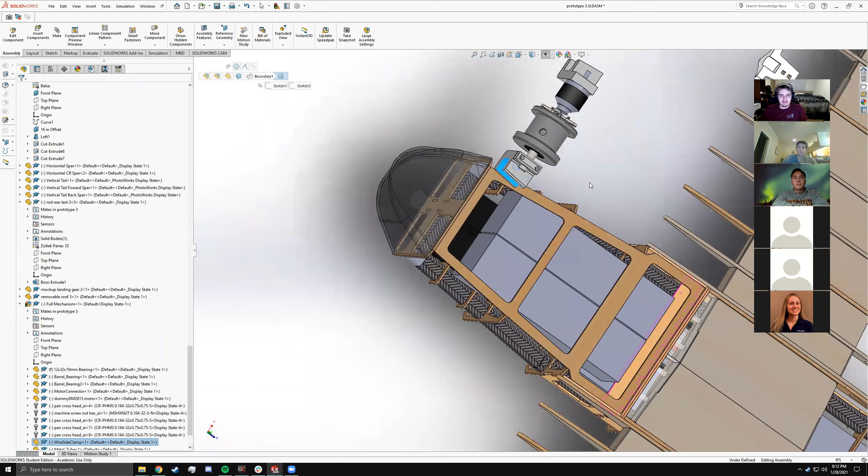But in terms of deadlines, in 2 weeks there's a 60-page report due that I'm going to have to talk with the leadership team about tomorrow. Luckily, you guys don't really have to participate in that if you don't want to. No, I'll try my best and help.

So how long until the aircraft is from completion? CAD-wise, again, we're probably about 80 to 90% there. The big pieces are in, but we just need the little pieces.

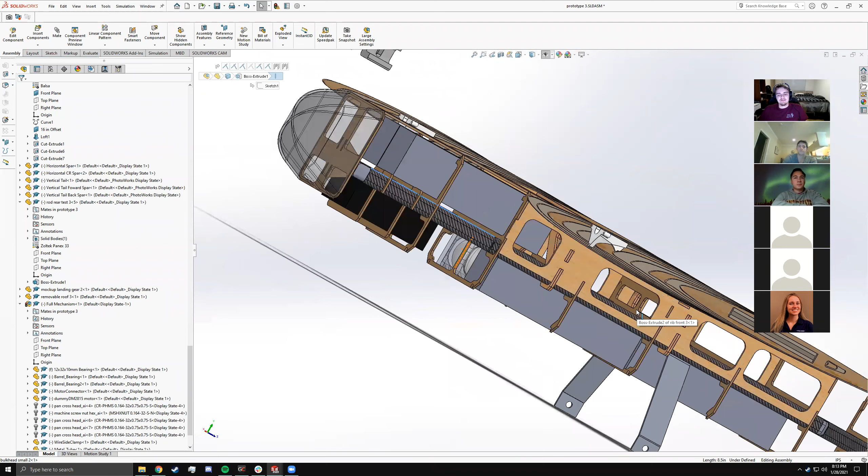And in terms of actually completing the aircraft, once we have the CAD finalized, even before we have all the little bits and pieces in, but we should have all the little bits and pieces in, we'll actually start building, and that shouldn't be that long once we have all our materials in.

But ASU as an institution is bureaucratic in nature, which means things can travel slowly sometimes. Yeah, we've ordered. Did we get that carbon fiber order in, Max?

Yeah, it was requested, but is yet to be approved. And you can start to see the bureaucracy, and it piles on from there.

Yeah, so we got like $500 worth of carbon fiber ordered, a bunch of it. Did we order more balsa wood?

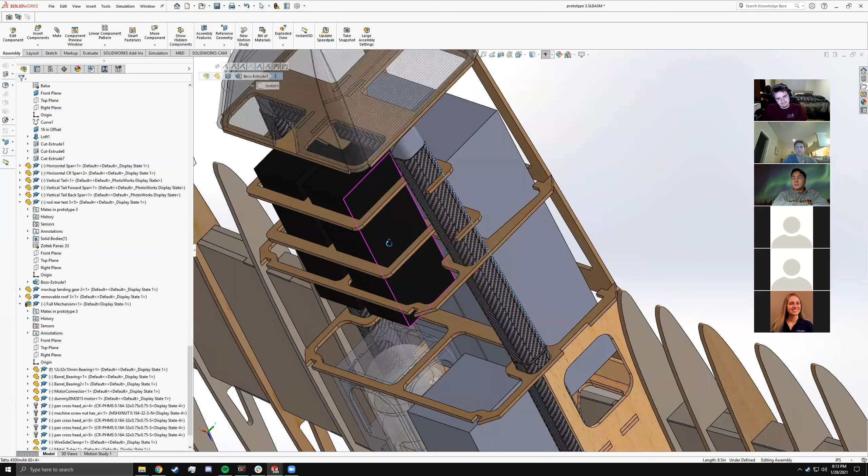Not yet. We're also gonna need a lot of it. I'll put in the leadership chat what type of balsa we're gonna need for the updated ribs and jig.

And we've ordered a few hundred dollars worth of batteries, or well, we are going to order -- we're still talking about that. A bunch of sensors and a bunch of other stuff that needs to be shipped once it's approved. Hopefully everything gets here on time, but a lot of that's out of my control, so I try not to worry about it.

All right, so that's everything.